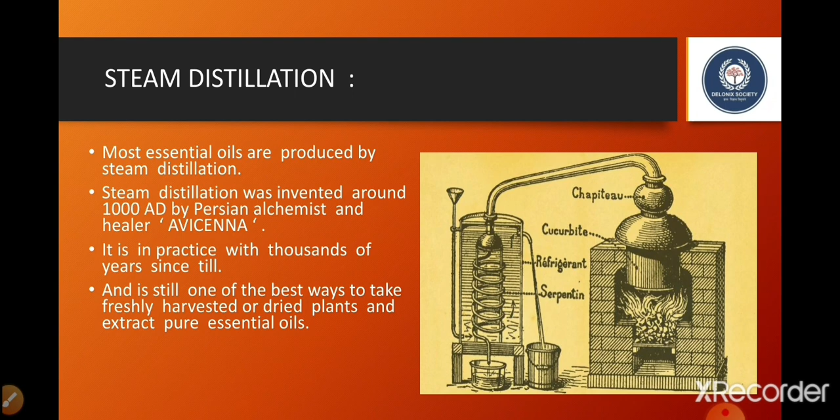Introduction. So we already know what is distillation. Then also we'll overlook the definition of distillation, so it can be easy to differentiate between distillation and steam distillation. So distillation is defined as the separation of the components of a liquid mixture by a process involving vaporization and subsequent condensation at another place.

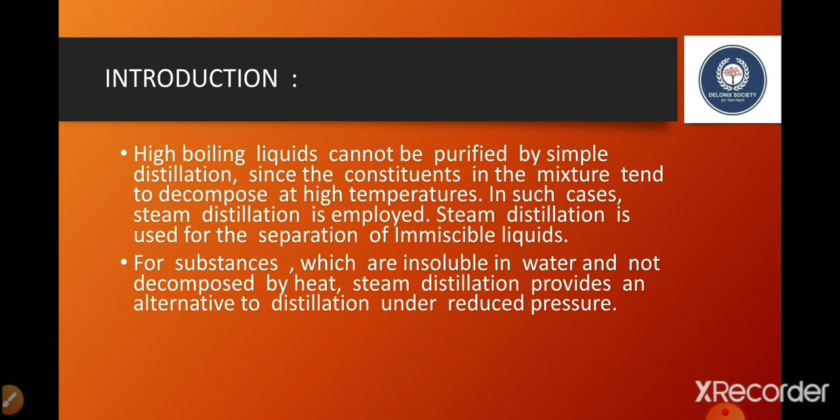So friends, be very careful that steam distillation is used for separation of immiscible liquids. For substances which are insoluble in water and not decomposed by heat, steam distillation provides an alternative to distillation under reduced pressure. So we'll move towards the principles of steam distillation.

A mixture of immiscible liquids begins to boil when the sum of the vapor pressure is equal to the atmospheric pressure.

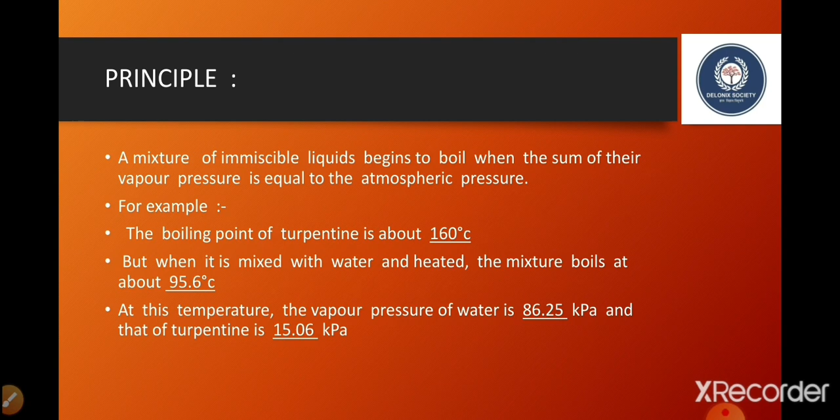Thus, high boiling substances may be distilled at temperature much below their boiling point when steam, means water or steam, is used.

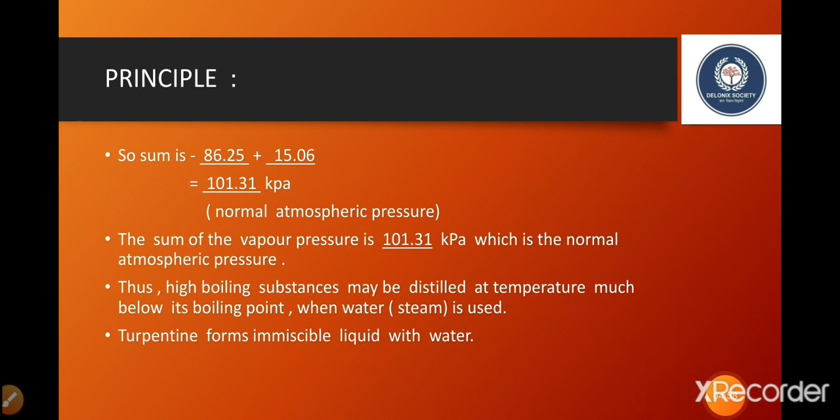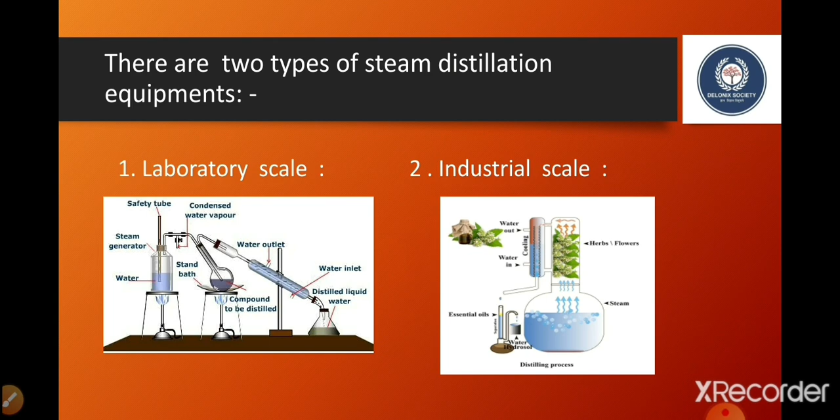And yes, turpentine forms an immiscible liquid with water. Now moving towards the construction of steam distillation. There are two types of steam distillation equipment. First is laboratory scale and second is industrial scale. So first we will go with the apparatus used for laboratory scale. So this is the construction of laboratory method. It consists of a metallic steam can fitted with a cork having two holes.

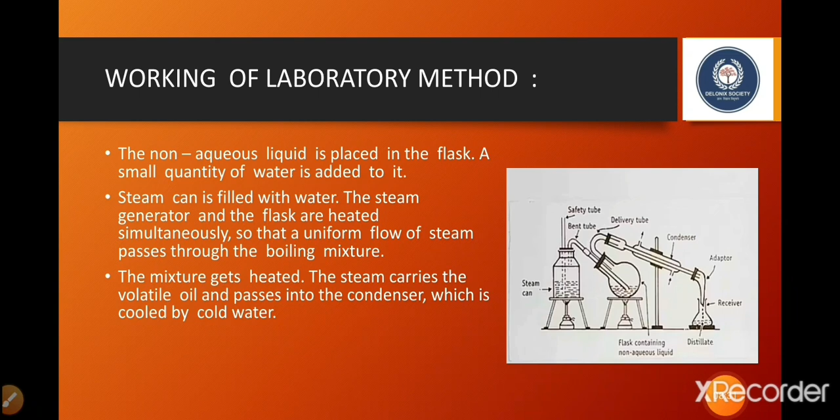The vapor gets condensed and the steam is again turned into liquid form. We get the immiscible liquid which is collected in the receiver with the help of the adapter. In the receiver, water and organic liquid form two separate layers, which can be easily separated using a separating funnel. This distillation process continues until all the non-aqueous liquid has been distilled.

So this was the construction and working of steam distillation on the laboratory scale. Now I will show you the video of how it actually works.

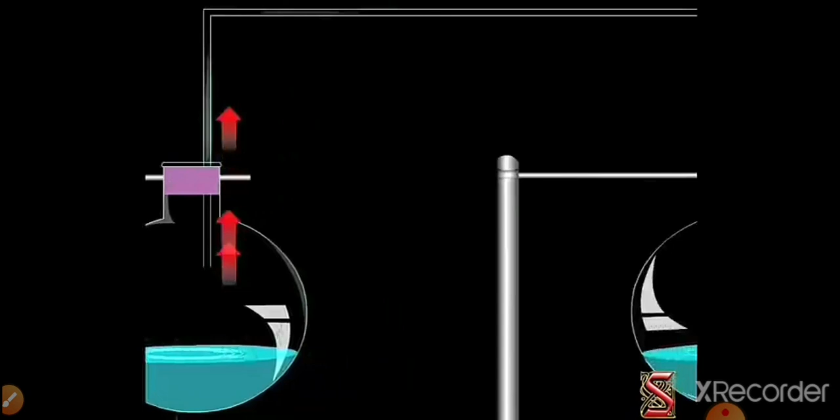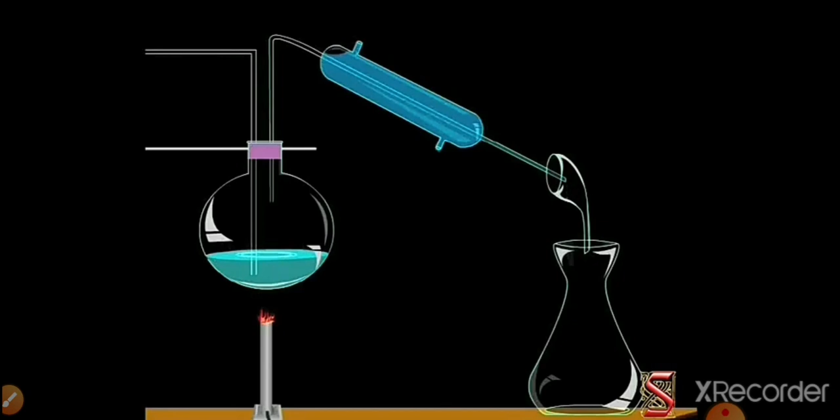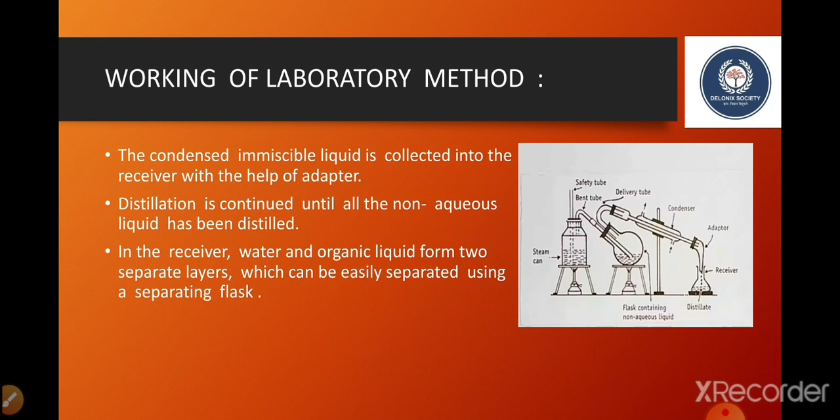The construction and working of industrial scale steam distillation is a little different from laboratory scale steam distillation. So we'll see the working now.

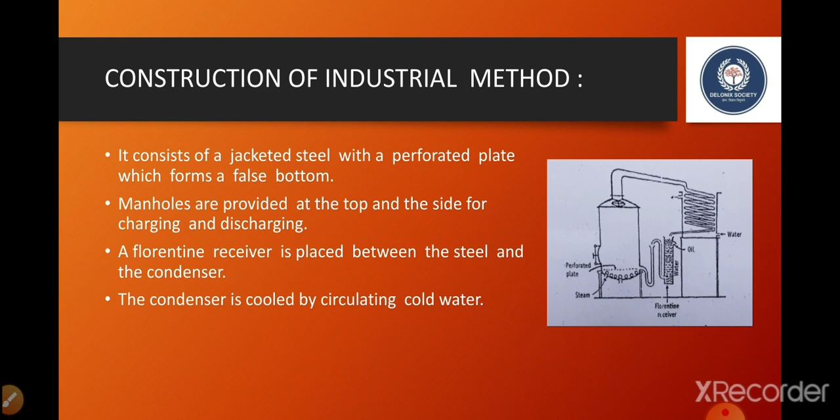Below this steel, water is placed, and above the perforated plate, the material from which the volatile oil has to be extracted is placed. The material like leaves of plant you can take, from which there will be extraction of oil. The water is heated until it starts to boil, and the steam is raised.

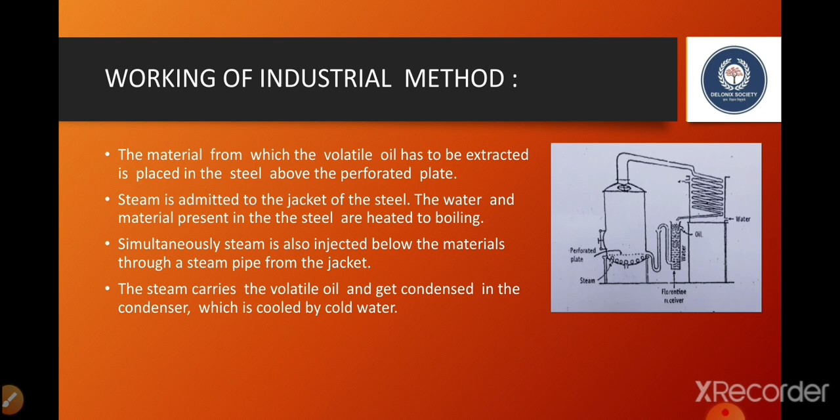As the heated steam passes through the material, the temperature causes the tiny sacs to burst out, releasing the essential oils. Essential oil rises up with the steam, and together the oil and steam pass through a tube. This tube passes through a coil condensing chamber, meaning the condenser, and the steam carrying volatile oil gets condensed.

Which is cooled by cold water, and is turned into liquid form which drips out of the tube. The liquid is collected in the receiver, and here the water and oil get separated naturally. The water, which is hydrosol, is left at the bottom where the oil rises to the top, and lastly the essential oil is collected from the upper right spout and water from the lower left spout.

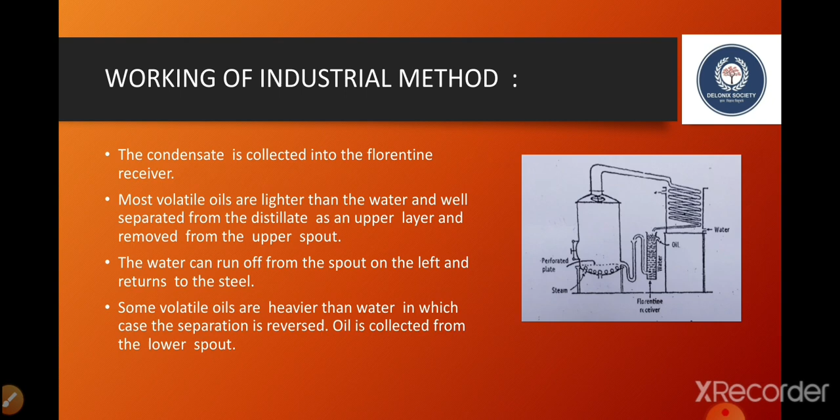In some cases the volatile oils are heavier than water, so this runs totally opposite in separation, where volatile oil is collected from the lower left spout. Now I will show the video of this afterwards.

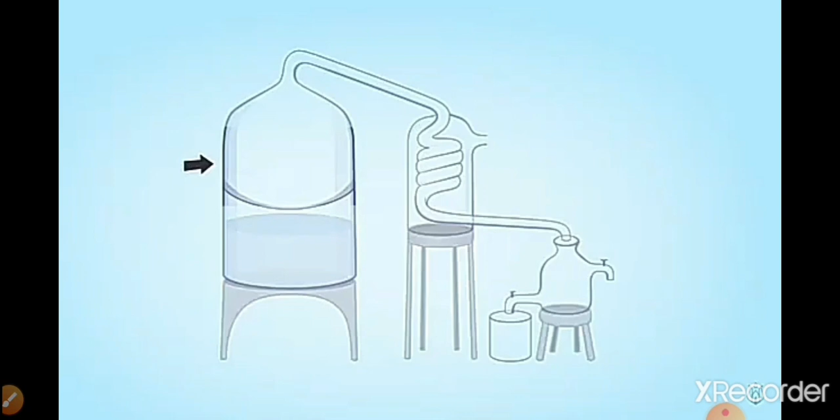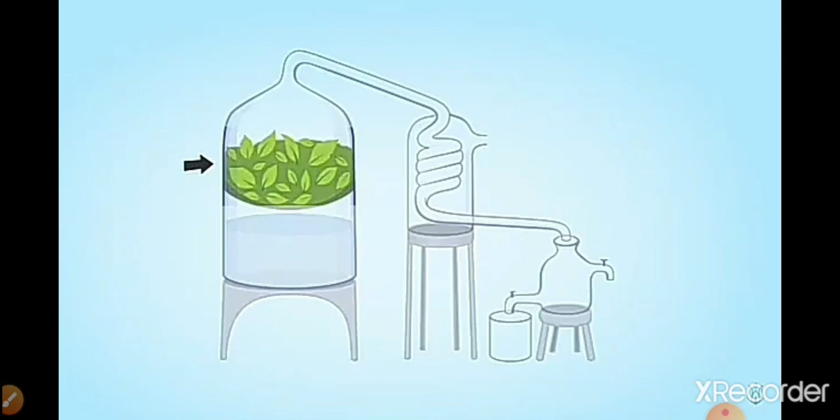So guys, this is the video of steam distillation carried on industrial scale. You can see here this jacketed steel. Below, the water is stored, and above that the tiny sacs, leaves, from which the extraction of oil is carried out, are placed there.

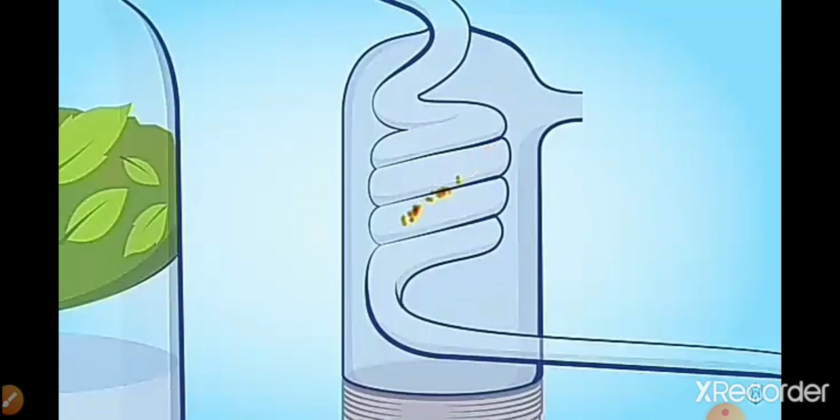As soon as we start to heat, when the steam comes up, the temperature causes the tiny sacs in the leaves to burst out, and the essential oils to come out from the leaves. Both the essential oils and the steam come into the coil condensing chamber, which is the condenser, and there it gets cooled, and is again turned into liquid form.

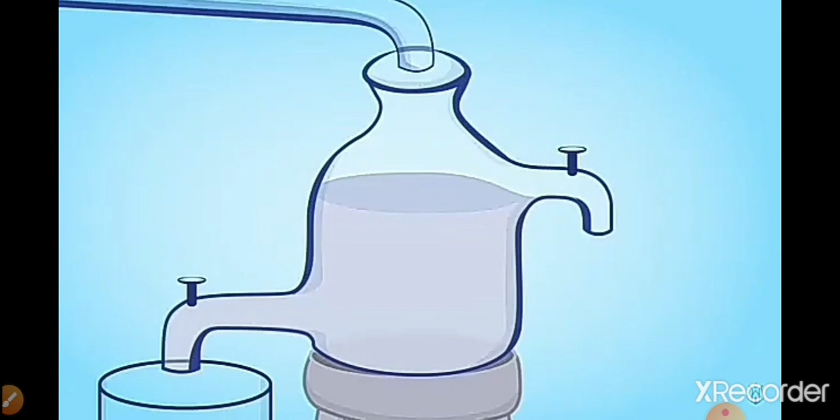And you can see here it is collected in the receiver from the upper right spout. We can collect the oil, and from the lower left spout we can collect the water.

So we'll see the applications now. Steam distillation is used for the separation of immiscible liquids, for example toluene and water. This method is used for extracting most of the volatile oils such as clove, peppermint and spearmint oils. Orange and eucalyptus oil are obtained at industrial scale. By this method also manufacturing of perfumes is carried out.

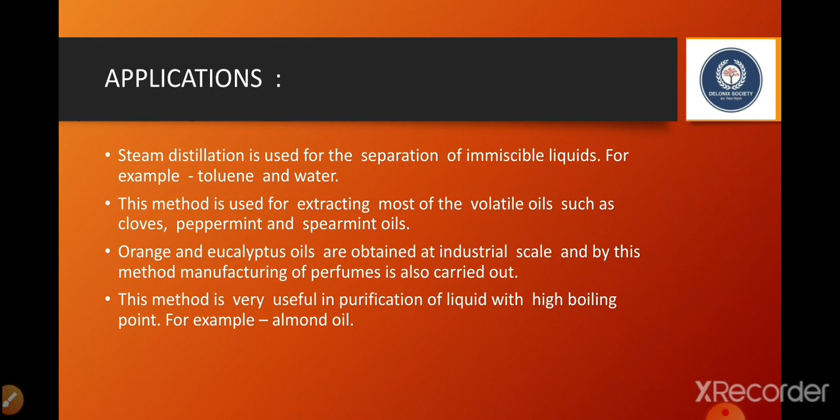And yes, this method is very useful in purification of liquid with high boiling point. As I told you earlier, for purification of liquids which are at high boiling point, this method is used. For example, almond oil, to flavor the liqueurs.

Essential oils from aromatic plants are extracted.

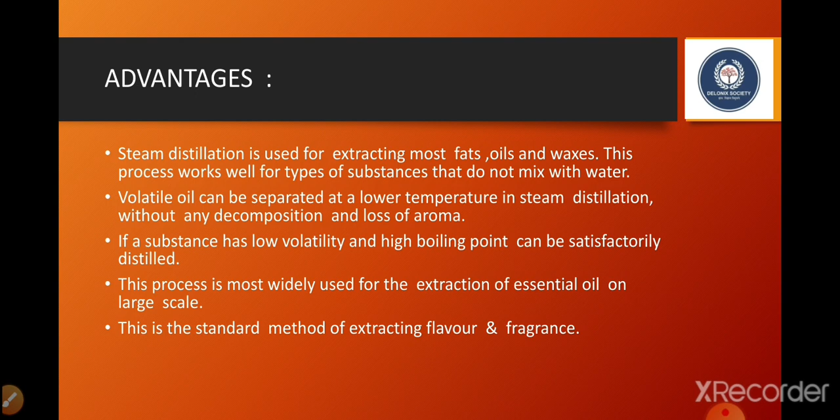Here are the advantages of steam distillation.